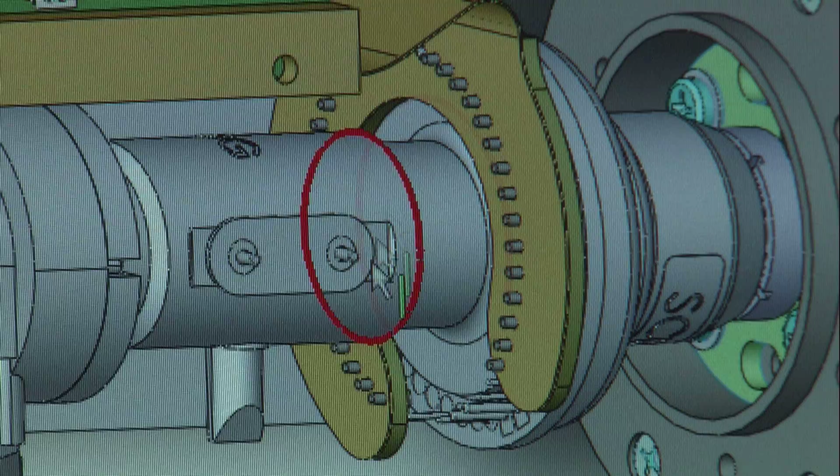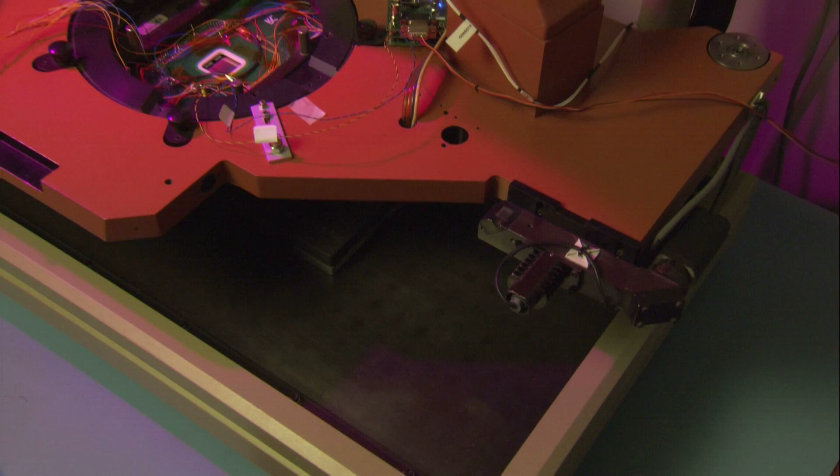Understanding the foundation of every good infrared camera is the focal plane array, and the efficiency and capability of the focal plane array rests with the readout integrated circuit. Nova Sensors grew out of the design and fabrication of the readout integrated circuit.

Hiring camera electronics design expertise to include firmware and software developers, and subsequently began building infrared cameras. Over the past 12 years, Nova developed and built 12 infrared camera models designed to work in different frequency ranges of the electromagnetic spectrum. More recently, Nova is focused on taking the camera electronics know-how to market.

Nova has introduced two new products, the Anacapa SWIR 640, a 640 by 512 shortwave infrared camera, and the Eagle, a 640 by 512 midwave infrared camera.

Nova Sensors is leading the field and thrilling customers with state-of-the-art readout circuitry, providing on-focal plane array processing. These designs greatly enhance situational awareness by the instantaneous selection between higher frame rates and higher spatial resolution, thereby providing both. We do this in real time throughout the entire field of view of the focal plane array.

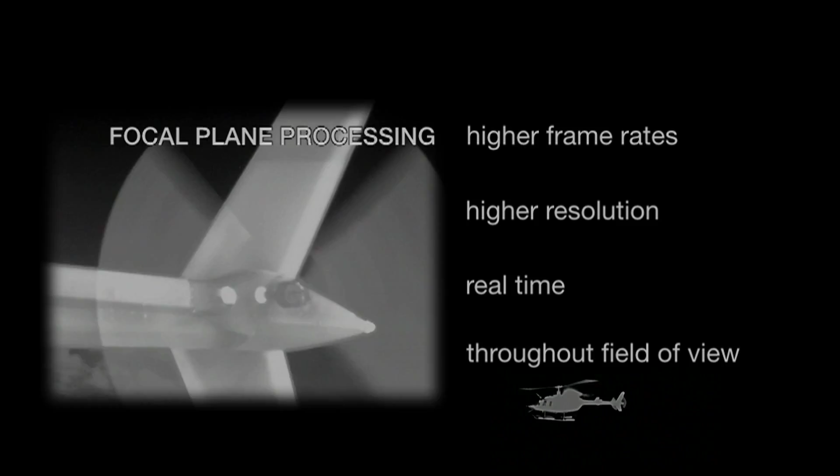Full custom and commercially available mixed signal readout integrated circuit design is Nova Sensors' specialty. We have developed mid-format and large format readout integrated circuits for use with indium antimonide for midwave infrared response, mercury cadmium telluride for both midwave and longwave response, indium gallium arsenide for near infrared and SWIR response, and quantum well infrared photodiode detector arrays for longwave.

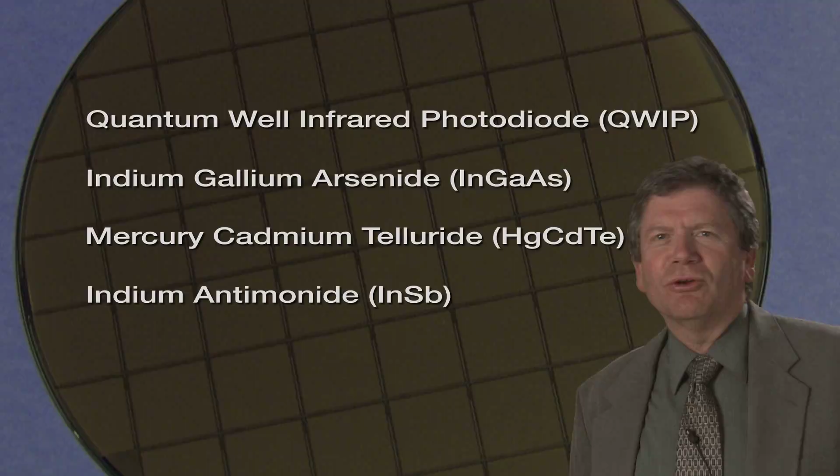Nova Sensors is joining forces now with Teledyne Imaging Sensors from California. This will facilitate a cohesive interrelationship in the development and the productization of infrared cameras throughout the spectrum.

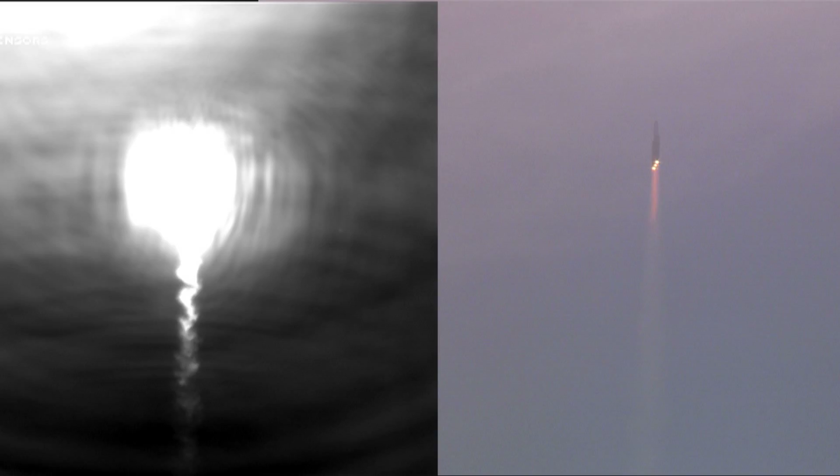Nova Sensors has designed, built, and tested cameras for military customers, including the intelligence, surveillance, and reconnaissance community. Incorporating low-power compact camera electronics, Nova Sensors offers cameras covering a wide range of applications, including hostile fire identification, missile launch detection classification, and dismount identification and tracking.

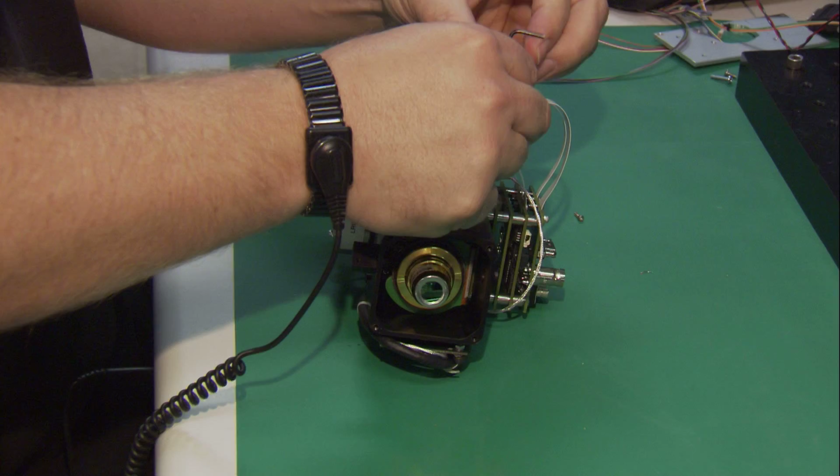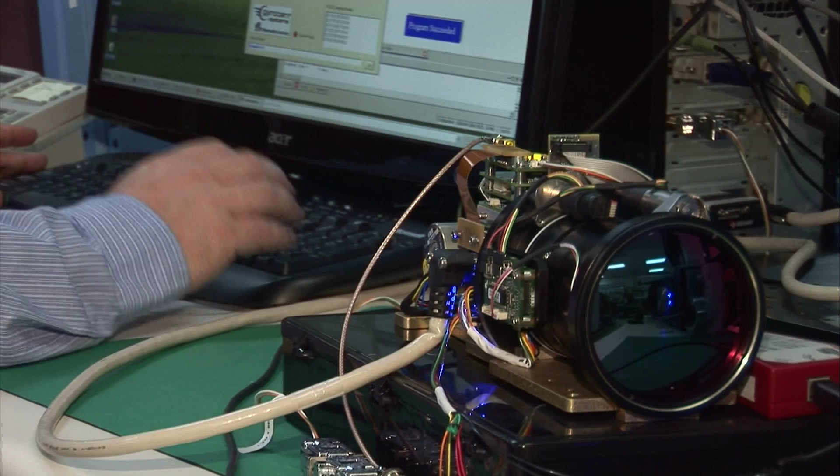The flexible open architecture of Nova's versatile infrared electronics allows inexpensive adaptation of components to virtually any focal plane array. End users get maximum customization options with minimal, non-reoccurring engineering costs. No other camera product line offers customers such options.

We have flexible tools and the experience to accommodate cameras, electronics to any focal plane array in the industry. We have modified our board set and the population of those boards to fit the particular application and overall system.

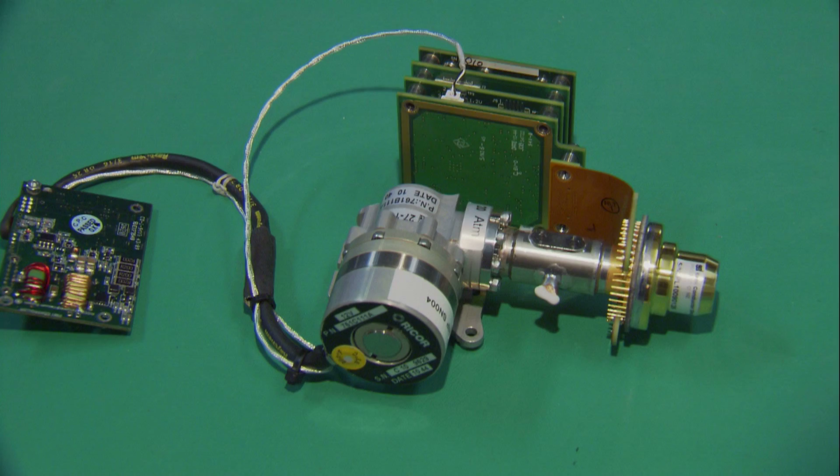This particular FPA is a 640 by 512 midwave detector inside an IDCA that will be deployed on a masted gimbal device on a manned ground vehicle.

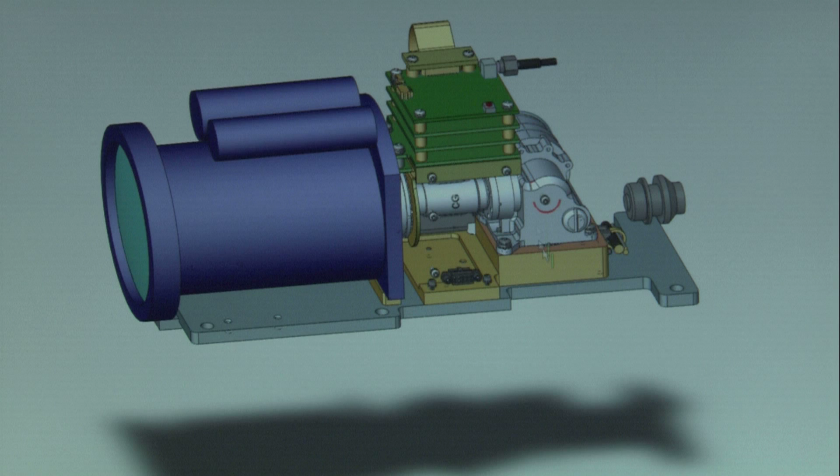In this case, we have configured our electronics to fit on the backside of the IDCA as opposed to the side on other cameras. The design tool we are using is called SolidWorks and is extremely flexible.

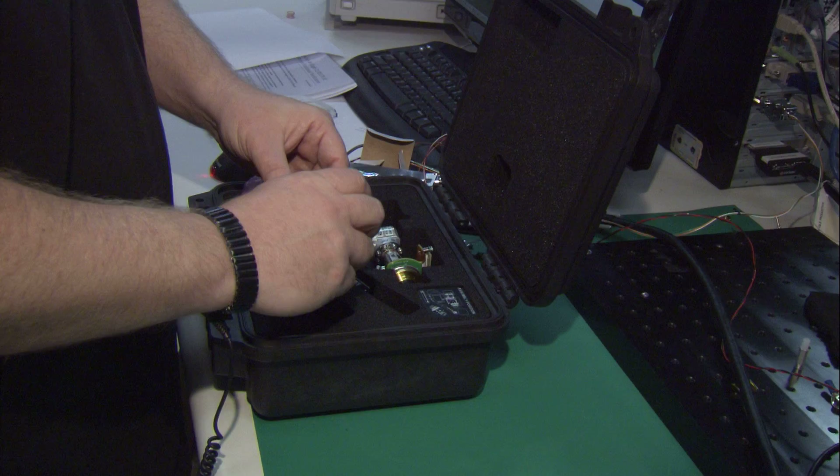Within a month's time, we can redesign the base set of electronics. They are designed for better reliability, easier manufacturability, and final assembly. Through our versatile set of electronics, we can drive any FPA in the industry for a different set of applications.

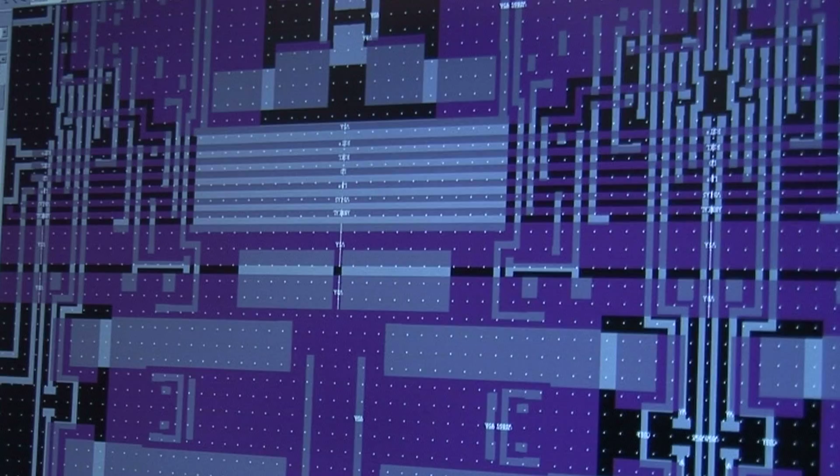Having worked in the infrared industry for a number of years, I have seen many advances in the technology. One of the areas where we at Nova Sensors excel is in the design of advanced focal plane arrays. We're experts at bringing processing onto the readout integrated circuit with the advantage of producing a lower size, weight, and power system.

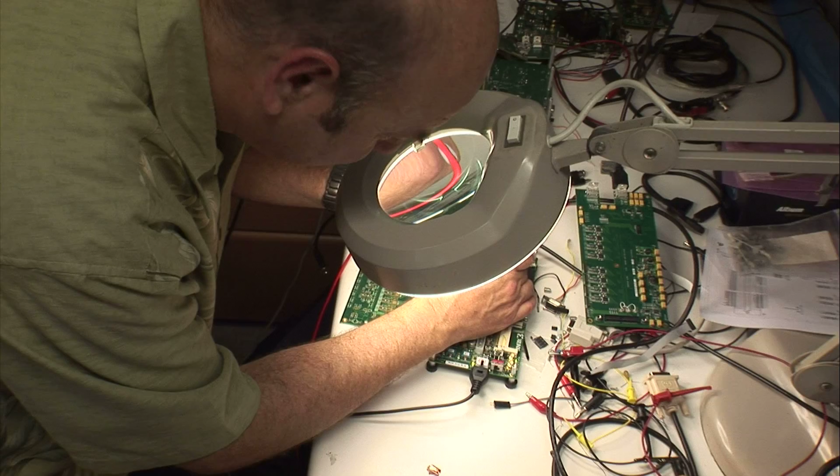Nova's specialization in design and development has produced a low-noise, highly integrated miniature camera electronics that operates in both visible and infrared focal plane arrays.

From the circuitry that runs our own variable acuity superpixel imaging, cooled or uncooled, to the flexible electronics we can adapt to FPAs from other manufacturers, Nova Sensors has a host of customizable miniature camera electronic solutions.

Nova Sensors has placed itself at the forefront of the competition with our Anacapa 640 by 512 shortwave infrared camera. The camera was designed for man-portable and unmanned aerial vehicle applications. It is small, lightweight, low power, and priced very competitively.

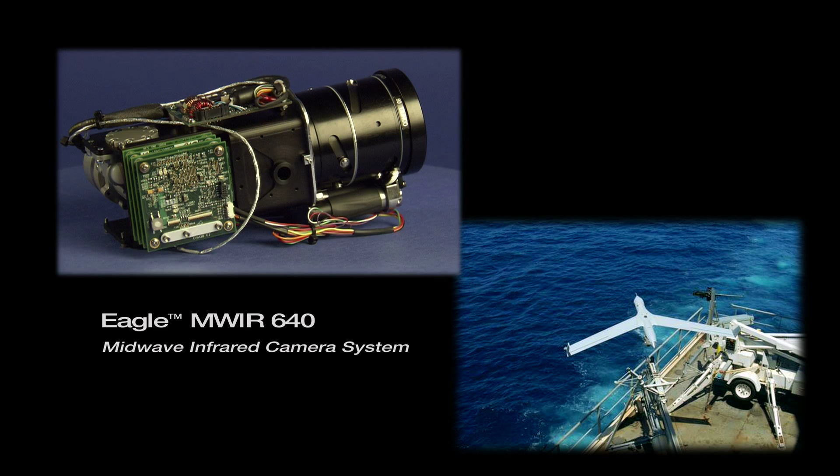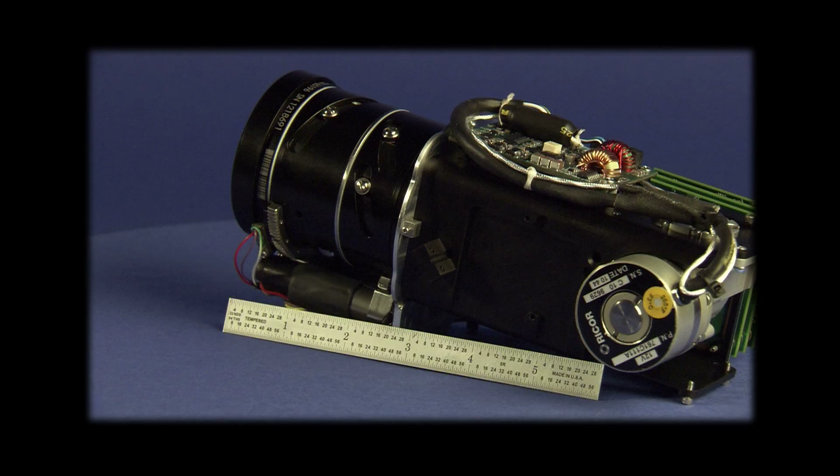The best mid-wave infrared imager in the industry, the Eagle 640 by 512 mid-wave infrared camera. Designed for small UAV integration, weighing only 1.175 pounds without lens. Built for size, weight, and power optimization, either for static, air, or ground-mounted platforms. Easy integration, custom applications welcomed.

Nova Sensors developed the Anacapa shortwave infrared 640 by 512 in under 6 months, and the Eagle midwave infrared 640 by 512 in just 3 months. What camera do you need, and for what application? We can do it for you.

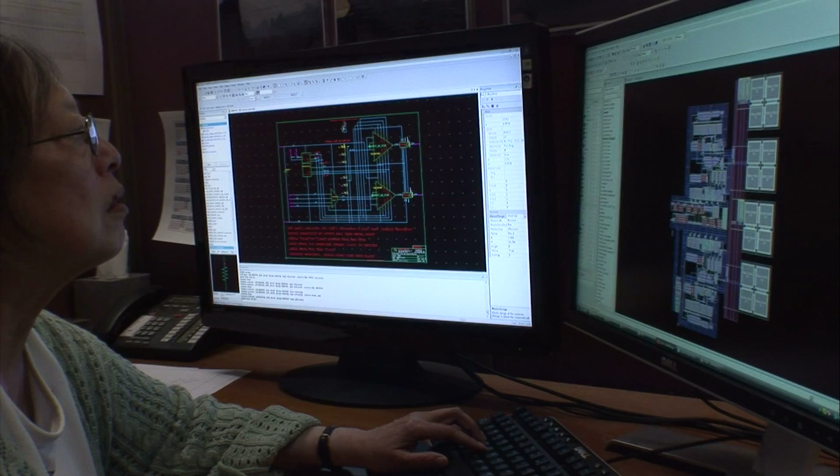Notwithstanding an enviable record of achievement, Nova Sensors is still a young company, lithe, flexible, ambitious, stretching itself in the market. Our infrared team, no mere collection of individuals, is an interwoven intelligence of experienced, adroit professionals at the top of their field and the height of their game.

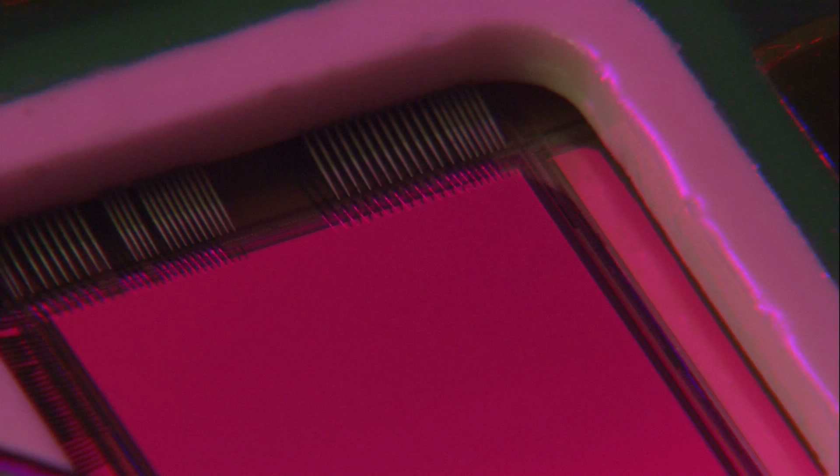Offered a challenge, the team's answer: of course we customize. What do you need? Need a closer look? Nova Sensors can help. Applications include, but are not limited to, persistent surveillance, multiple dismount tracking, reconnaissance, security from Port Authority to space-based, airborne, man or unmanned, masted camera placement, gas detection, and industrial inspection.

Nova has many years of experience in the field of readout integrated circuit design. We have designed and implemented camera systems small and large format, up to 1K and 2K, from vanilla and foveating ROICs, giving the camera the ability to see large fields of view in low resolution with windows in high resolution, saving bits of data, bandwidth, or increasing up to muzzle flash frame rates or higher.